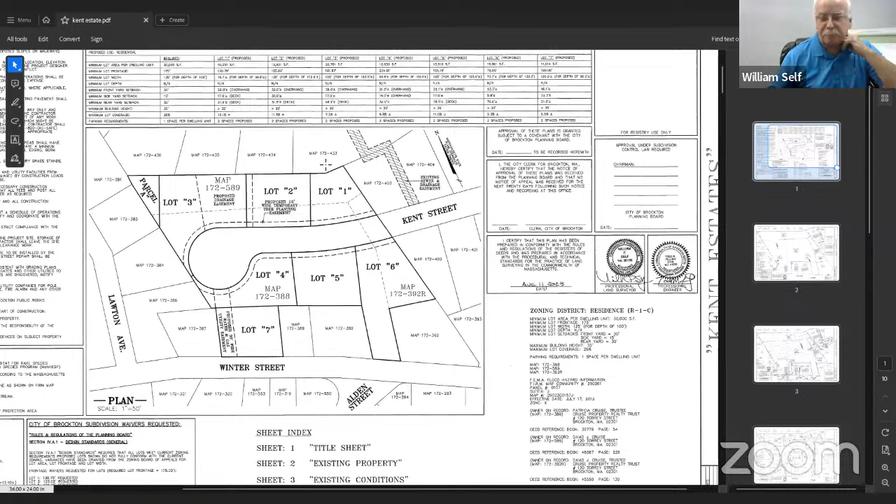Okay Bill, you're ready? Yeah, good evening. If Sean, if you could call up the plans, if you could have the screen, Rob. There we go, can everybody see that? Yes, sir. Yeah, we were here in front a few months ago with the preliminary plan. From then, after approval, we went to the Board of Appeals and got approval on the lots that were deficient in area, frontage, and lot width and depth. As you see, I'll explain exactly where we are. This is up off of 262 Winter Street, being shown where lot 7 is. And then access for the subdivision will be off the end of a dead end, existing now, Kent Street. And at the end of Kent Street is lot 6, which is number 34. Both number 34 Kent and 262 Winter Street are owned by Dave Cruz Properties.

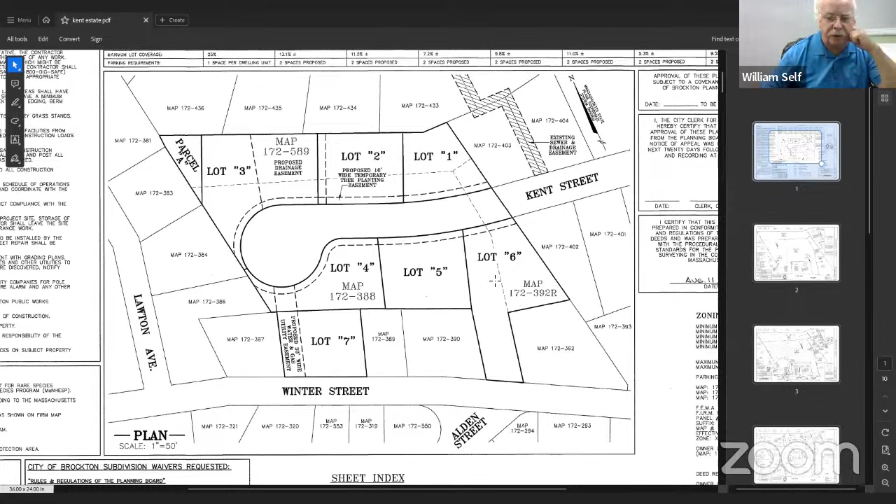If we could go to sheet number 2, Sean, and if you could reduce that a little bit. Sheet 2 - I just wanted to show the board, remind the board, what the configuration was. You had 3 separate lots. You had the 262, which is comprised about 2 acres. You had the lot to the back, about 28,000 square feet, over half an acre, that was owned by the city of Brockton, bought by auction by Dave Cruz Properties. And you also had number 34 Kent Street. If you look at number 34 Kent Street, it was a very, very odd configuration when the lot was first created. What we needed to do was redivide everything, both those houses, both those lots, and create the roadway. By the results of that, we improved the condition, certainly of number 34.

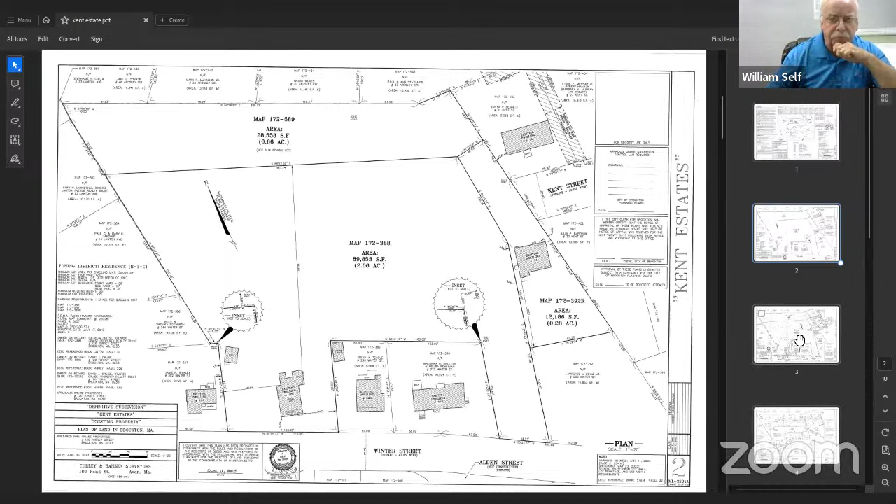If we could go to sheet number 3, I think, Sean - sheet number 4. As you can see, if you can just see where the original lot lines were dashed in, you can see the reconfiguration starting with number 34. You can see that it certainly made it a much better lot.

With the reconfiguration, that was the lot with the least frontage of all, which we ended up asking for relief on, for 75 feet on that. The way we looked at it, it had great improvement to where the house was. Now you can actually have a driveway, and a more usable lot out of that.

The rest of the lots that you can see are all being proposed as raised ranches, consistent with the other housing in the neighborhood, except number 262, which is an older colonial style home fronting on Winter Street.

They'll construct a cul-de-sac at the end. We asked for a waiver on the total length of Kent Street to be able to develop this particular configuration.

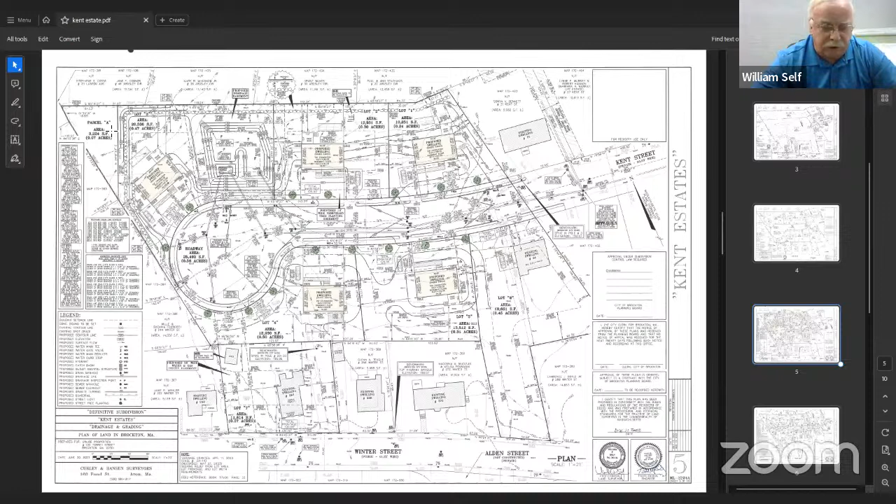Yeah, Mr. Sweeney, the only waivers we're asking for as far as utilities, under the recommendation of Chiki, we had moved some basins down, and because of that we needed a slight waiver on cover, a 4-foot minimum, but he was fine with that. We went over everything with them and showed them what we're doing, so that's listed on page 1, all the waivers that we're asking for.

It's all inclusive. There are three waivers, correct? Frontage waiver for lots 1, 2, 5, 6, and 7. And then for the dead end street, correct, and then the typical residential cross section.

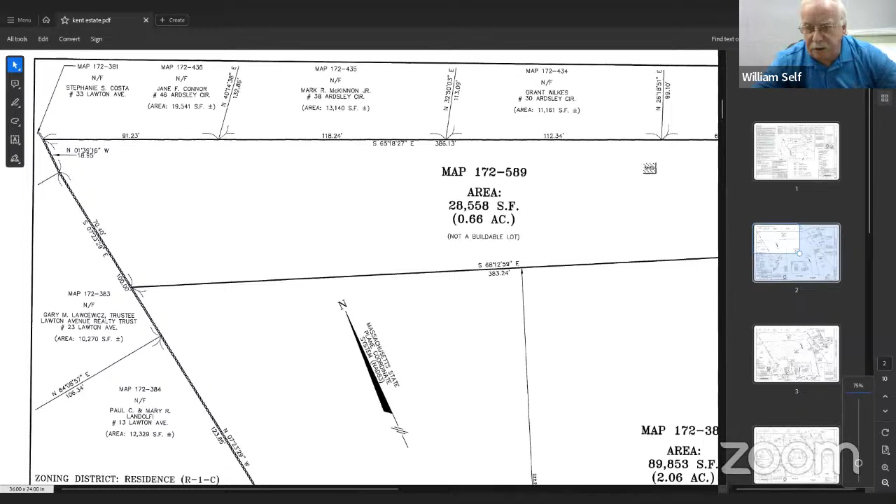If you go back to sheet 1, Sean, you'll see the waivers we're asking for the design standards, exactly lot 1, 2, 5, 6, and 7 were the waivers for the frontage. For the dead end street, we're asking for the waiver of your 700 feet to 810.8 plus or minus feet, which is an extension of about 394 feet of roadway that we're adding. And then the other waiver we asked for was the cover over the pipes on the drain pipes that are listed on sheet 1.

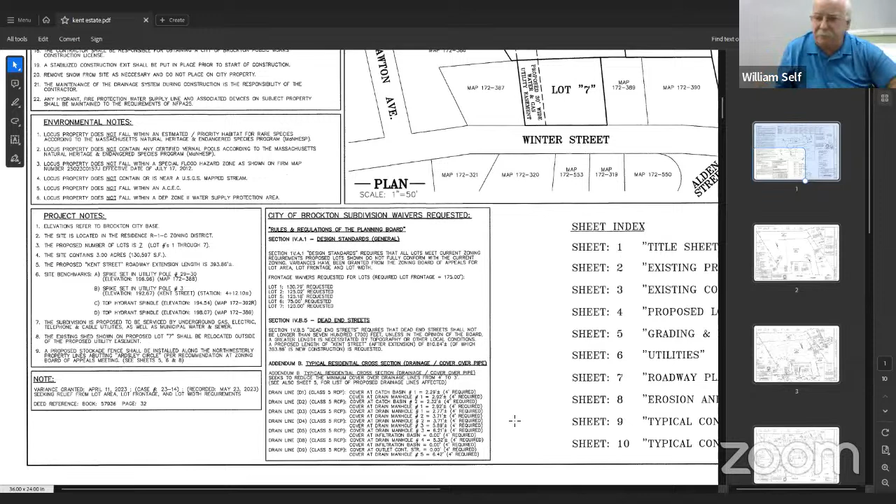Okay, so if this plan is passed, then these waivers would be voted on individually at the end. Okay. Madam Chair, if I could ask a question? Sure. Mr. Self, how do you do? I was not on the planning board when you first came, so I just have one quick question. I understand that the neighbors were talked to, all the abutters around this development.

Yes, we had at least two on-site meetings during the design stages. We had one when we first initially came up with it, and we also had a secondary one getting closer to the final. We had those with the city council, and we settled up with them, so it worked out very well. The abutters came in.

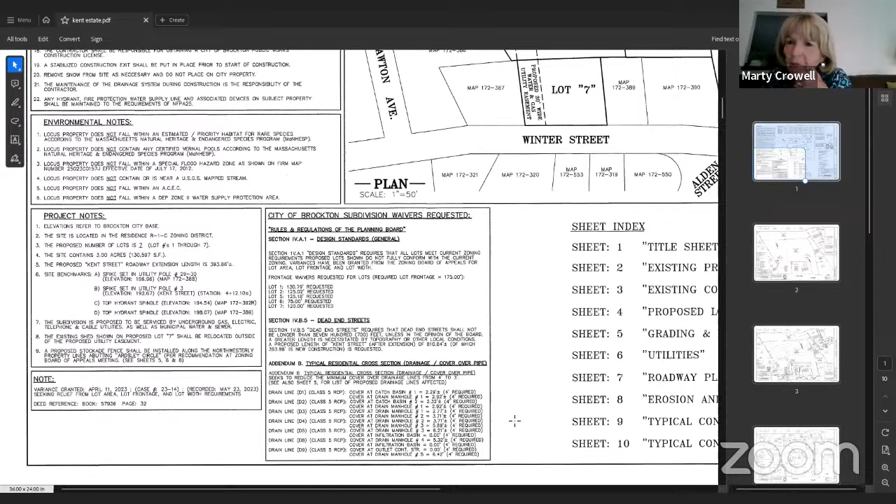Again, the concerns that were brought to us are always water drainage, surface water, things like that. And the other thing is they all want privacy, and the new lots will want privacy as well. So that was brought up and agreed with the homeowner, so we thought we were working with the neighbors as well. The development is going to add to their property values as well. I certainly hope so. Yeah, it'll be nice, new, and there's been improvements down in that area already, roadway improvements. So it'll be a great asset to the neighborhood, we feel.

Okay, again, thank you, they were very helpful. Thank you very much. Thank you, and welcome to the board. It's nice to see you. Nice to meet you, thank you.

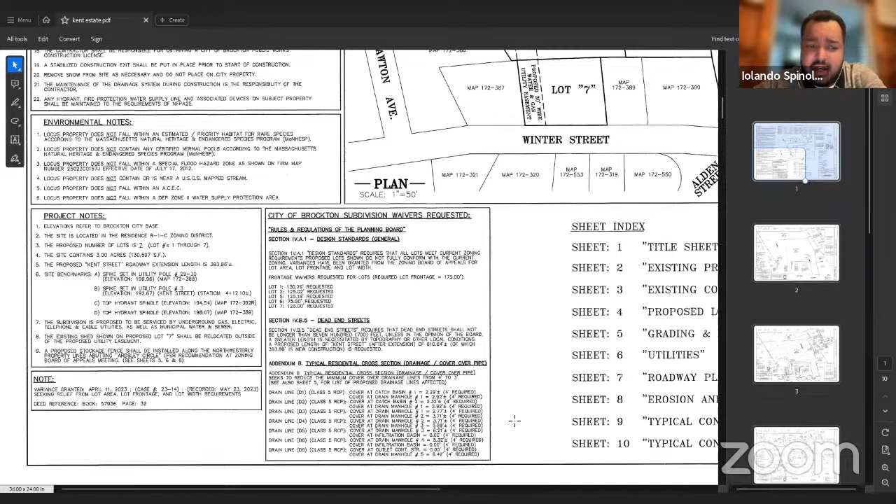Okay, other questions from the board? Yes, Madam Chair, I'm just wondering if he can speak on amenities like streetlights or sidewalks. Are those not included?

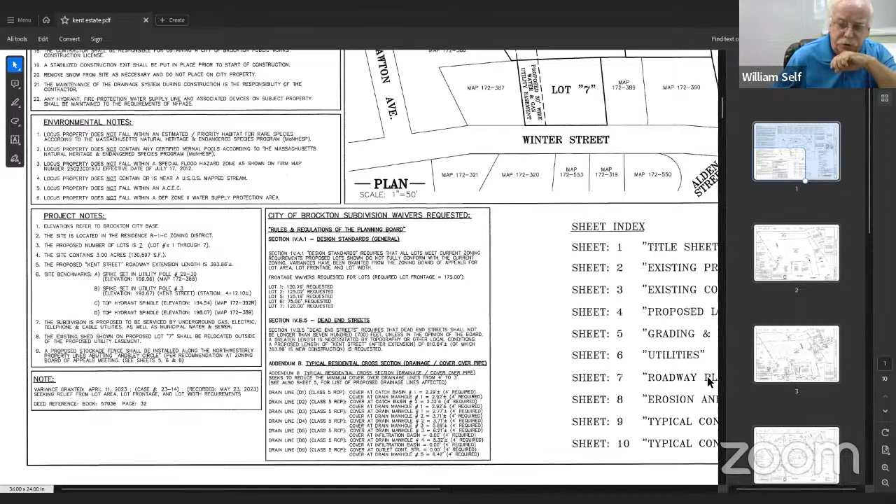Yeah, Sean, if we could go to sheet 5, actually let's go to sheet 6 if you would. Sheet 5 is good, well, sheet 6. Yeah, that's good, sheet 6. What you'll see here is what we've done. We haven't asked for any of your roadway construction waivers. It's sidewalks on both sides, granite curbing all around. These lots are being accessed and built on for both sides, so it's not like it's just a one-sided street where there's a different case for use of sidewalks and things.

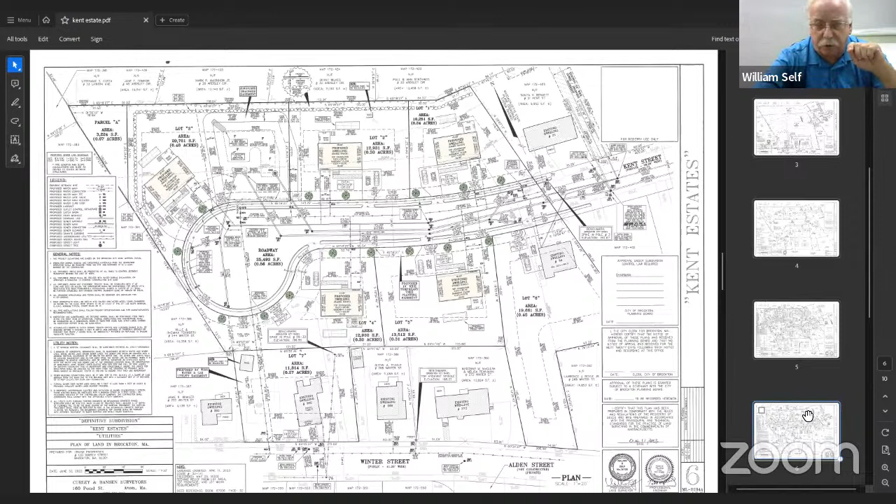So those waivers, we have not asked for any waivers on sidewalks, curbing, or street width. We feel Kent Street has good width to it. It has no sidewalks or curbing on it, but in the future, should the city do an improvement on that, it would certainly add to a nice street.

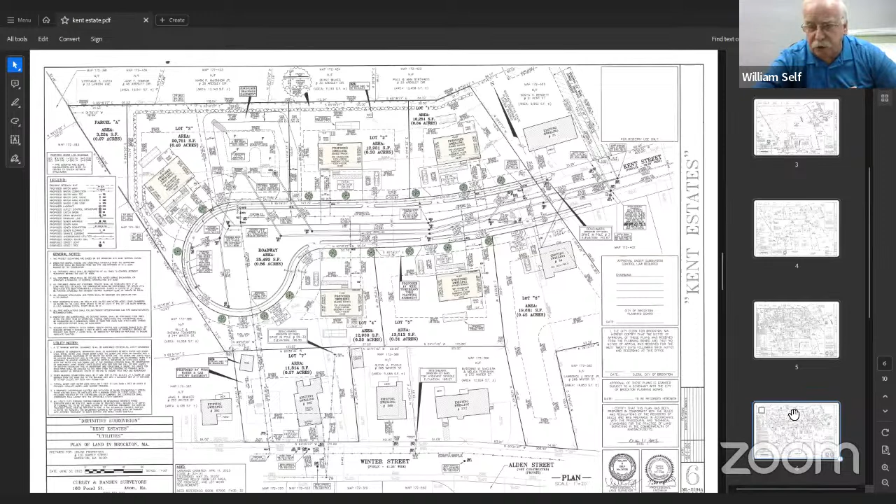The other thing we try to do in our subdivisions is create a 10-foot planting easement all the way around the street on the back of the lots. That's where we put our trees. The green circles here show where the plantings will go. We try to get 2 or 3 on each lot.

The reason we do that is to keep them back so that in the future they're not lifting up the sidewalks. Over years those trees grow, and next thing you know everyone's tripping on the sidewalks because it heaves the concrete or cracks it. So that seems to work out well. That's the amenities we put in to dress it up as best we can.

Thank you, I appreciate that. Seems like it's well designed. Yep, thank you.

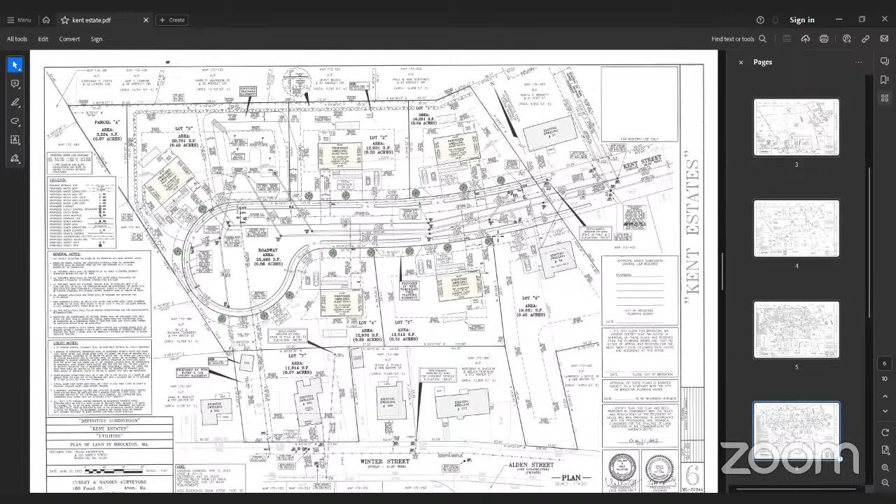I just mean keeping what we have, but also some kind of restoration. The people are worried about making eye contact out of their back window with someone else. That's half the fun of being neighbors.

And, Madam Chairperson, if I could just jump in quickly. I think what the contractor realizes too is that it works both ways, privacy for the existing residents and privacy for the new lots as well. We feel that with the raised wall down and back, and that little plateau plus that open area, we're going to try to save as much as possible, as everyone has seen, once trees are cut down in what's not really a dense forest, the trees look a lot different once you take all the brush and everything else away.

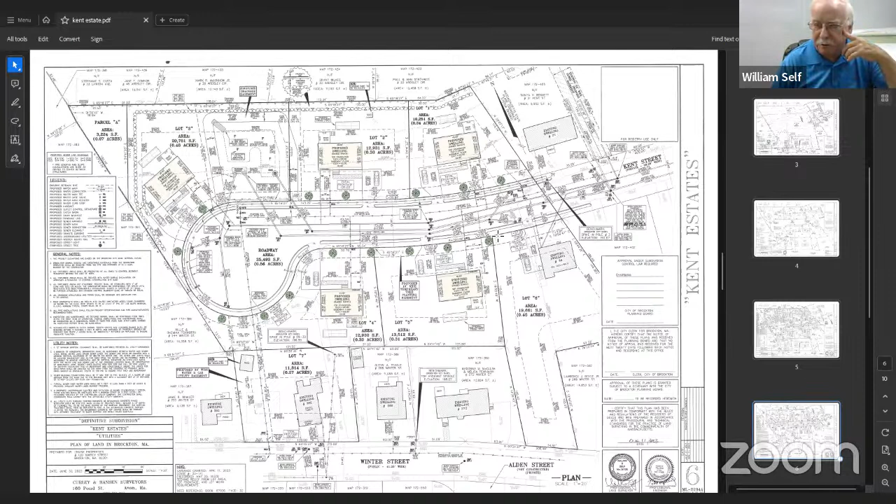But I do think there'll be additional planting from the new homes. They'll want to plant along that wall, and that'll be for additional privacy in the future. That's what we're hoping and encouraging. Thank you, all right, thank you.

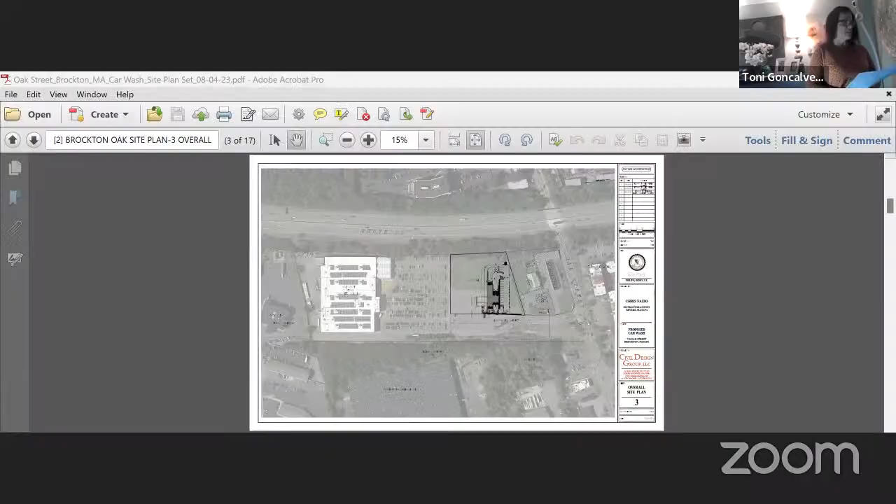And while you're doing your presentation, can you also speak to the approval needed from conservation? I guess there's an outstanding issue or meeting with them, if you could clarify that for us. Sure, for the record, my name is Phil Henry with Civil Design Group.

We are the civil engineers on this project. Can everybody see the screen? Could you make it a little bit larger, Phil? Let me see if I could zoom in.

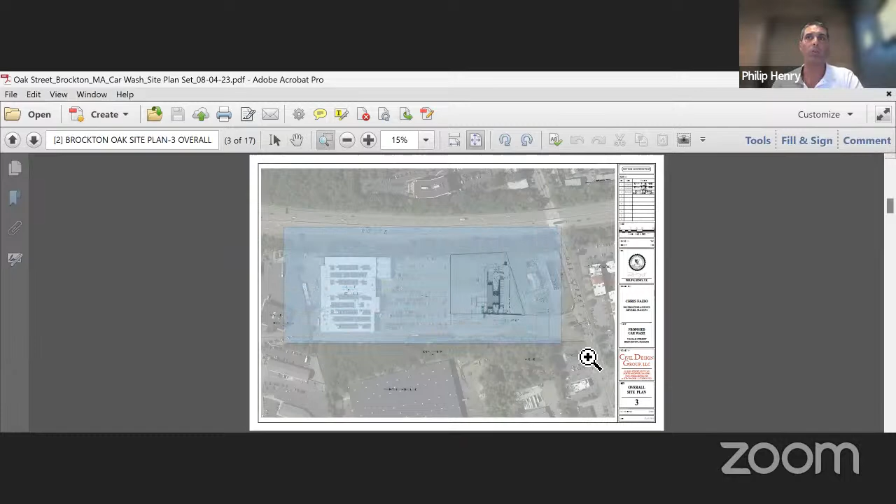I'm going to start with this locus plan to orient everyone, although I'm assuming everyone knows where and what we're talking about. Is this better, Rob? Okay, so just to situate everyone, Route 24 is running along the top of the page.

Oak Street is running along the right side of the page, up and down. This is the Walmart here, and this is the Walmart entrance. The subject property before you tonight is this trapezoidal lot area, about 2.5 acres in size. As you can see from the aerial underlay, it's largely comprised of open lawn area and a section of the Walmart parking lot. What you see on top of the aerial is the facility that we're before you tonight.

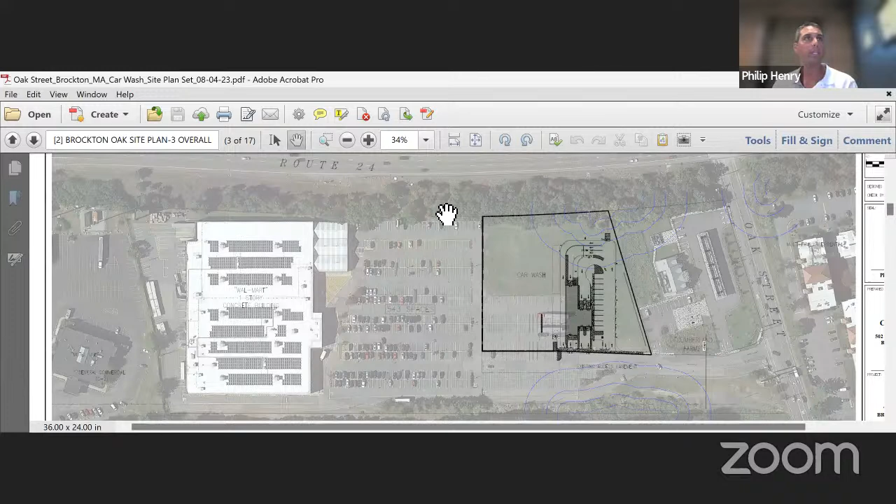So with that being said, I'm going to pan down. Okay, so now I've zoomed in and rotated the property such that Oak Street is off the page here. The convenience store and the gas station is just off locus in the front here. This is the Walmart parking lot, or drive aisle excuse me. And then the Walmart is off to the rear, off locus in the southerly direction.

So what we're proposing is about a 4,500 square foot vehicle washing facility that you can access via one main access drive off of the Walmart drive located here. As you enter, you have the option to use one of the 12 vacuum spaces, one of which is ADA compliant. Once you're done vacuuming your car, you can then enter one of 3 ways into the facility - there are 2 entrances here, and then there's also 1 entrance here as well.

There is also, should you just want to vacuum or decide you needed to leave the facility, this outermost lane which provides an overflow queue lane, just to exit and not be stuck in the queue itself. In terms of exiting the property, all access drives exit back onto the Walmart driveway. Then you could choose to either go back to your vehicle after the car wash, or exit via the signalized intersection on Oak Street.

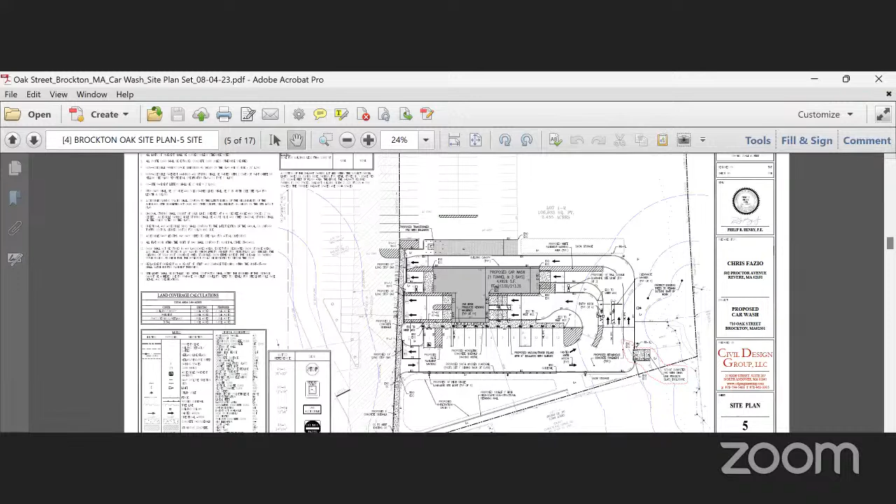So Mr. Henry agreed to that, caution signs, cars exiting, and so that can be, if this is passed, it can be a condition. In the way of speed bumps, what were you thinking, or what was the zoning board thinking?

Well, we didn't get to that point. We did know that they have to stop here before. We just made it so we can kind of see it before it happens, kind of thing. And if it does happen, I'm hoping they would take the proper precautions to keep people from frequenting a massive store like that. So I just don't know how the board feels about anything else of that nature, but I just kind of wanted to get it out there.

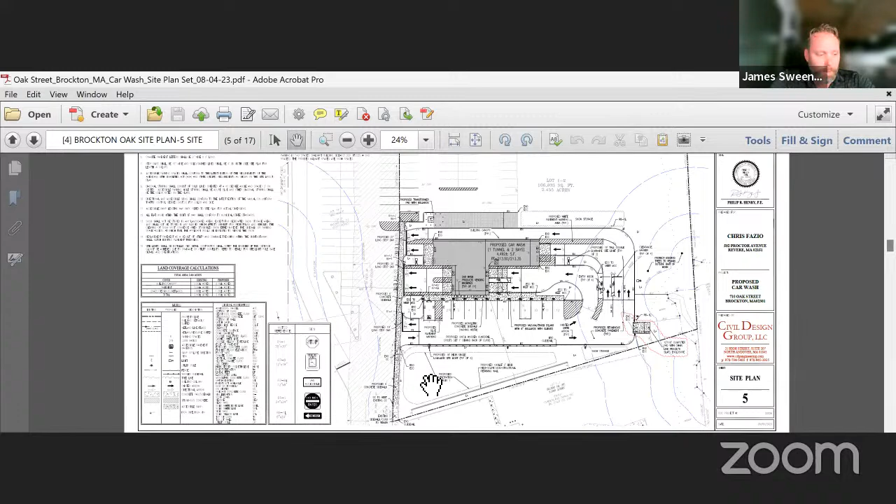Yeah, it's kind of hard to tell what's going to happen. In one sense, I think it might slow down people coming out of Walmart, and then if the sign Mr. Henry agreed to, and if there are further issues, hopefully you'll work together.

Who's the property owner? Is that? I am Chris Fazio. But the whole lot, the Walmart, is the whole Walmart larger area, the whole property.

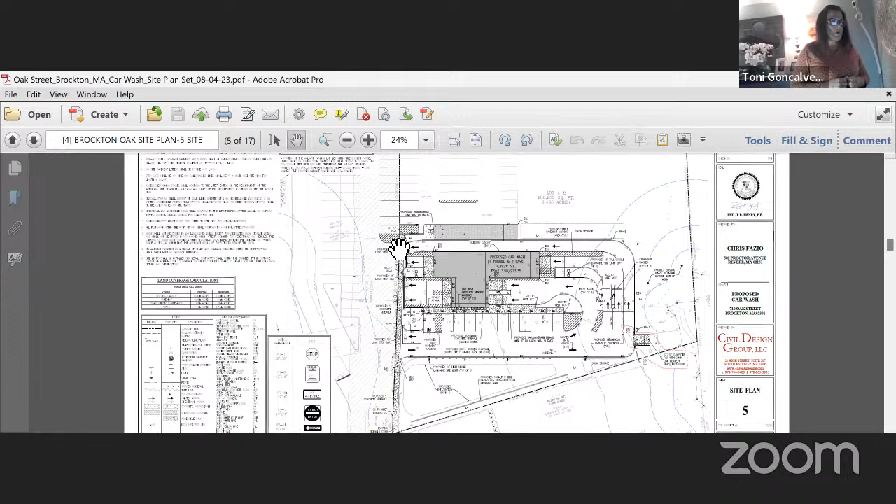Just to clarify, the 2.5 acre property where this facility sits was subdivided out. So it was once all Walmart's property, but this is its own property, as is the convenience store and gas station up front, its own property. So technically, there are 3 properties here, if you will: the Cumberland Farms that faces Oak Street, and then this property before you tonight, which accesses its property through the Walmart easement.

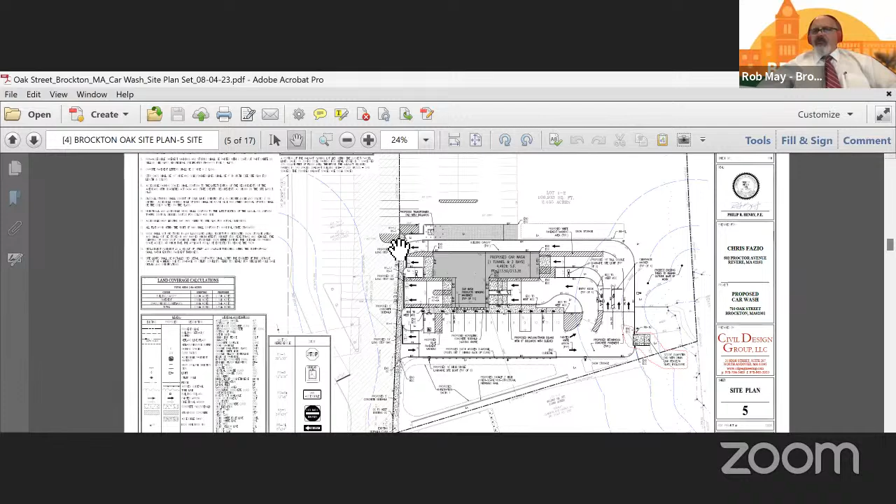Mr. Henry, could you go back to the locus map that had the ortho behind it? It was easier to see where vehicles were coming and going.

Yeah, I mean, just based on anecdotal experience, because we did the Cumberland Farms as well, a good majority of the folks also use this outside lane. Although I agree with you that incoming traffic uses this inside lane, if you will. But, you know, we would tend to agree that with the structure here, I think folks will naturally slow down.

We're also willing to add any signage that the board may feel necessary on our property, and we'll be committed to working with Walmart to the extent that we can on adding any signage on their property.

If I could just add, I mean, I can foresee this. If someone's coming from right where 24 is in the top part of the parking lot from Walmart, you know, I could see him coming right to a point where your exit is, coming through there, and you've got, you know, a corner right there. That's not, you're not going to change any of that parking lot within your property, right?

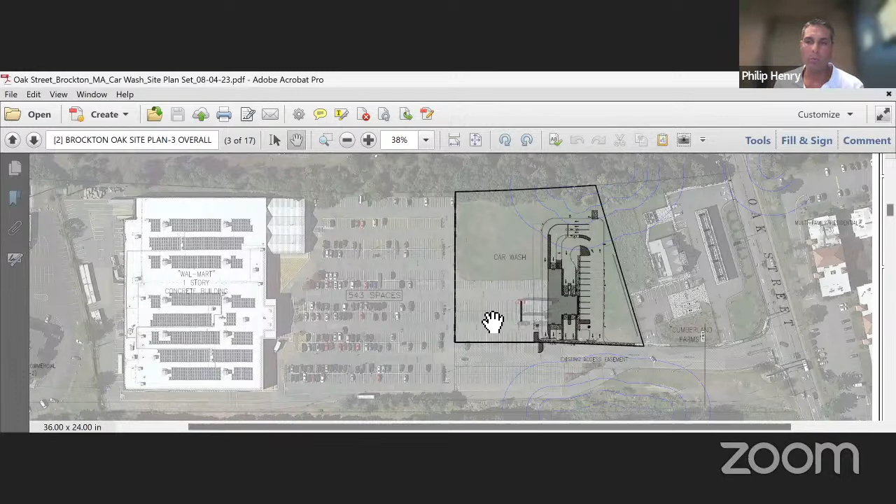No, we're not proposing to change that. I can see, assuming another car is coming from the opposite side, you triangulate on the exit of your car wash.

Do you see what I'm saying? Are you saying people are going to cut through here? Potentially. You might want to consider boxing off your property. That way you keep a straight line, and that would avoid such a wide angle of cars meeting at the same point. Do you know what I mean?

Yeah, I know exactly what you mean, and I appreciate the comment. I believe, and I'm not the transactional attorney on behalf of Chris, but I believe there is language that requires the parking spaces on Chris's property for Walmart to be unimpeded. So I don't know if we can do any physical hindrance here.

But could you cap the ends of those rows with some sort of curbing? Right where your cursor is, at the end of that row and up the end of that row, that would eliminate a lot of cutting through and maybe draw the traffic down, just to get it straight, a beeline.

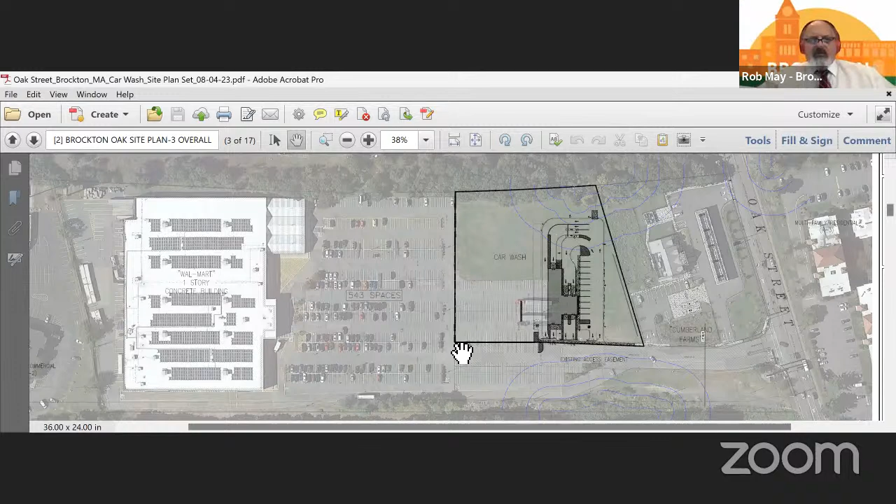Mr. Henry, could you zoom in a little bit more so we can see where that is? Because it looks like the property line is at the back or in the middle of a parking stall. Yeah, it's along the spine of the striping.

Madam Chair, I was wondering if they can clarify, you can't restripe any of those parking spots? Or you can't do any restriping on your property?

I believe there is language in the agreement when Walmart sold this property to the seller that a certain number of spaces needed to be maintained. And I could tell you that the number of spaces proposed to remain meets the zoning, which is 543 spaces based on the current zoning parking requirement per the Walmart gross square footage.

So, in full transparency, I think carving out some end caps with landscaping, although that's a very good idea, I just don't want to put the Walmart in non-compliance. Which is why... go ahead.

Quick question. Right where the cursor is, just below the property line, there's a little appendix that seems to stick out, shaded as if it were a landscaped area. Is that true, a landscape buffer? Here, because that's where the lane changes. That's right. Yeah, so this is proposed to be striping.

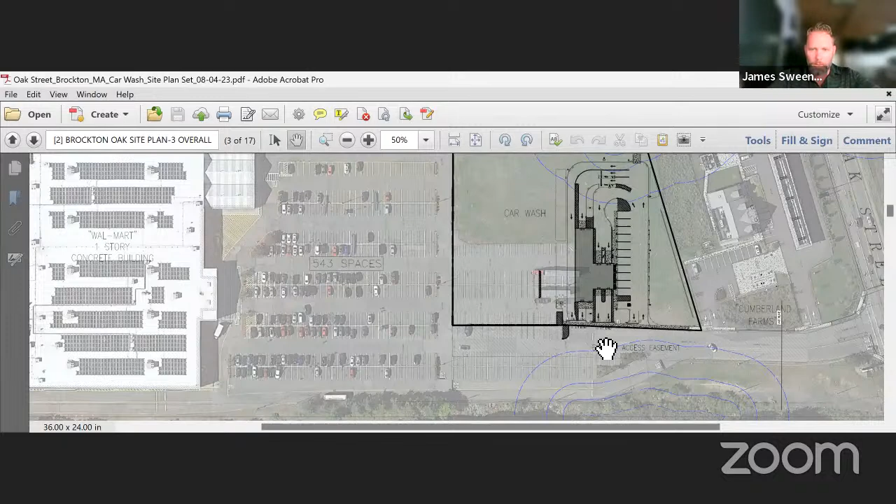So if you're coming out of the Walmart and looking at your property from that side, where the rows are, could there be signs with directionals to focus the traffic going down where we want them to go? That shouldn't be a problem. Maybe two signs on each of the rows there, so at least we're telling them where to go.

And if you could work it out with Walmart, that end cap where you have your little appendix hanging down outside of there, if that were a raised planted bed, that would be a lot more conducive to slowing traffic than just the safety tape. But that's something that's not on your property, so I understand you'll have to negotiate that with Walmart.

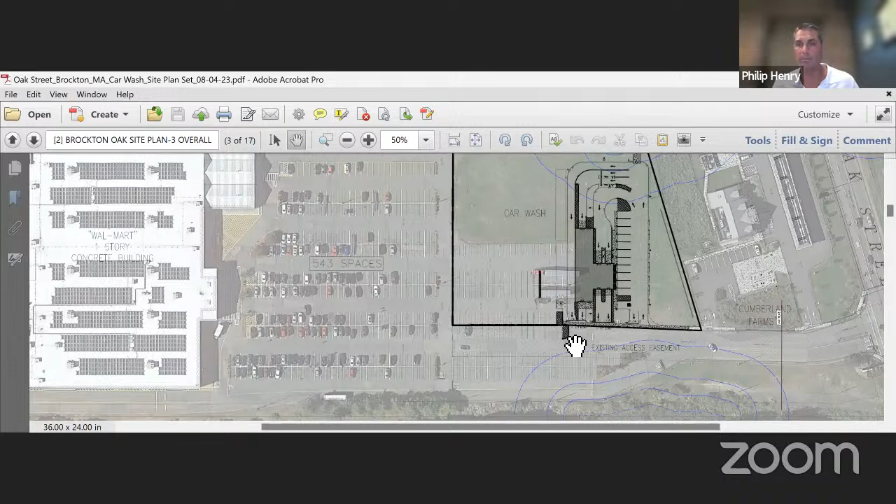Exactly, yeah. We can work in good faith with Walmart and propose that, because as part of this deal I think Walmart has to approve the layout as well, so we can show that to them and they could opine on that. I think one of your strengths here is this traffic is also their issue too, so working this through behooves them as well.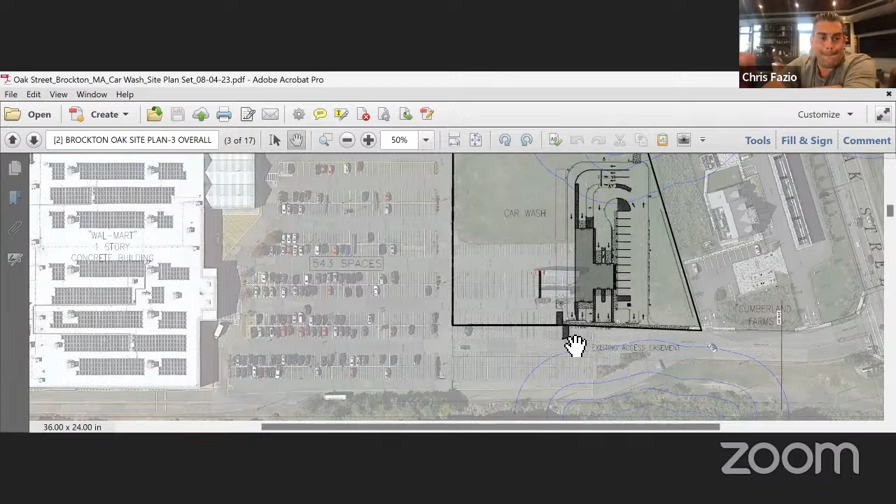Madam Chair, if I could — this parcel of land was originally intended to have many stores on it, and it sat for a lot of years with just Walmart there. So I welcome this car wash.

I live on Oak Street and I frequent Walmart. When you turn in from coming down Oak Street to take a left, there's an arrow for people to come in and arrows for people to come out. The light is excellent, and since Cumberland Farms has been built, I don't know of any problems. People can clearly see there's a gas station there, and people are exiting and entering the gas station right from that Walmart road. So I don't think it will be a problem to add a car wash. I really don't see it to be a problem.

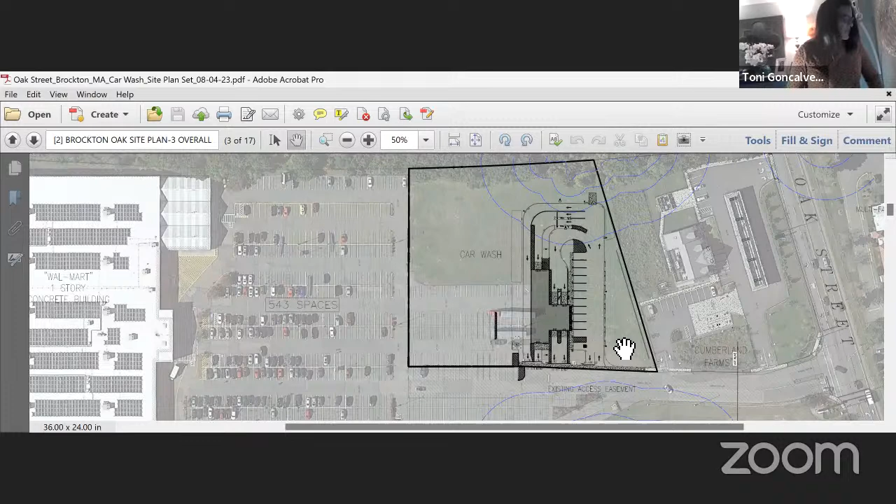No, it's designed nicely, but I do think we need to take caution with the cars exiting. We were very cautious when we approved Cumberland Farms with the way cars entered and exited to make sure there weren't any issues. We just want to do the same with this very nicely designed car wash. I also welcome it.

Madam Chair, I just have one question. I noticed that Cumberland Farms has a sidewalk approaching the Walmart. I know this is a car wash and you're not going to have people walking up to it, but there might be people passing by the car wash to get to Walmart. So I was wondering, is that little shaded area an extension of the sidewalk? Yes, when we met with Rob May in his office, probably over a year ago, that was his first comment.

So there's the sidewalk. Great. I appreciate you all — it seems like you're trying to be good stewards. I appreciate that.

All right, any other questions before we open up? Yes, Larry. I have a question — not so much about the plan, but the operation: what are the hours, and is this an automatic car wash, or a manned car wash, or a little bit of both? This is fully manned, minimum of 2 employees at all times.

There are 2 in-bay automatics, and there is 1 tunnel that is fully automatic. So there are no self-serve bays where the public can come in and wash their own vehicles. They're in the vehicle the whole time; they do not exit their vehicles. There's no walking around — the only time they would be walking around is just vacuuming their vehicles. So again, it's fully automated and it is fully manned.

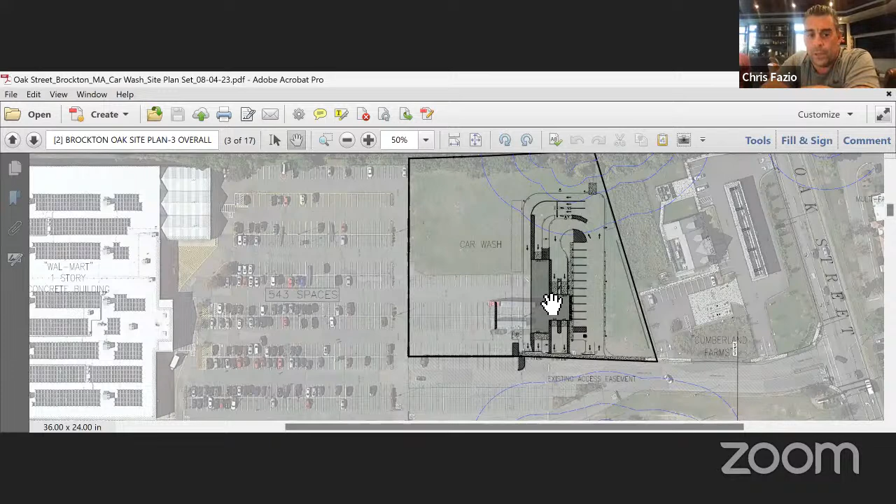And the hours of operation, Chris? 7 a.m. to 7 p.m. Okay, 7 days a week? Yes, 7 days a week. Thank you. You're welcome. Thank you for the questions, planning board members.

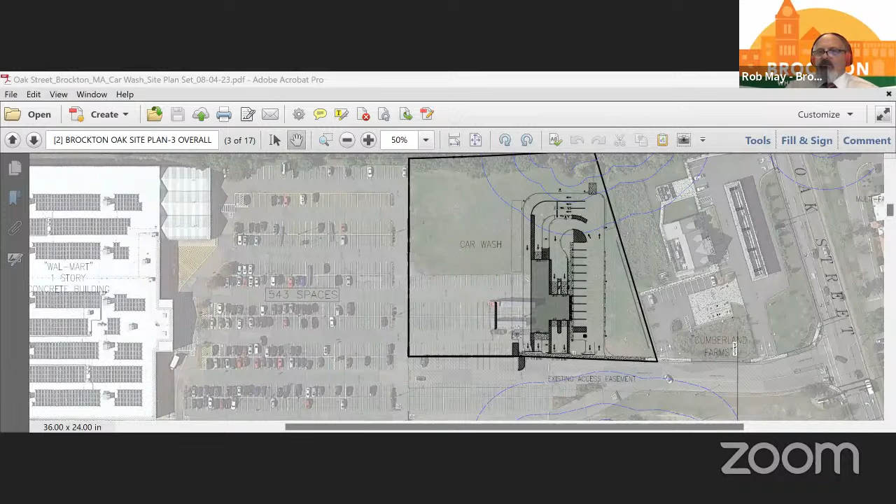Okay, so before we're ready to make a motion, if this plan does pass, there is one condition: flashing caution signs on the front side of the building and the back side facing Walmart.

Is there a motion? Motion to approve with standard conditions and also final approval being contingent upon the Conservation Commission approval, and we need to add the condition for the flashing caution signs. I thought you were prefacing that, and also the conditions stated by the chair. Okay, thank you. Second, Marty, did I hear Marty make a second? Yes, second. All right, perfect.

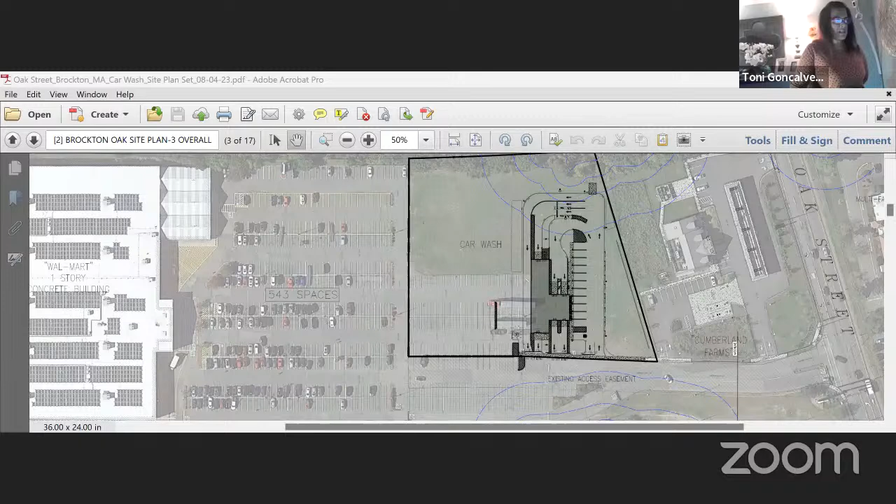Roll call. James Sweeney, yes. Marty Crowell, yes. Larry Hassan, yes. Yolanda Spinola, yes. Toni Goncalves, yes. Congratulations, Mr. Fazio. Thank you, Mr. Henry. Thank you. Good luck.

All right, next up, we have a site plan review, 26 School Street. This is a 40R, and the representative is Scott Rubin, Esquire.

Scott, we've brought Carlos forward, but is there anybody else on your team that should be here? Yes, we have Coleman Barnes. There's Coleman, yes, most importantly. He should be joining now.

Hello, everybody. Looks like my camera's having some issues. Give me one second. As long as you can share your screen, that work? Who's having issues? Coleman Barnes, it's just my camera. We can continue if that's fine. Okay, yep, sure, we can hear you.

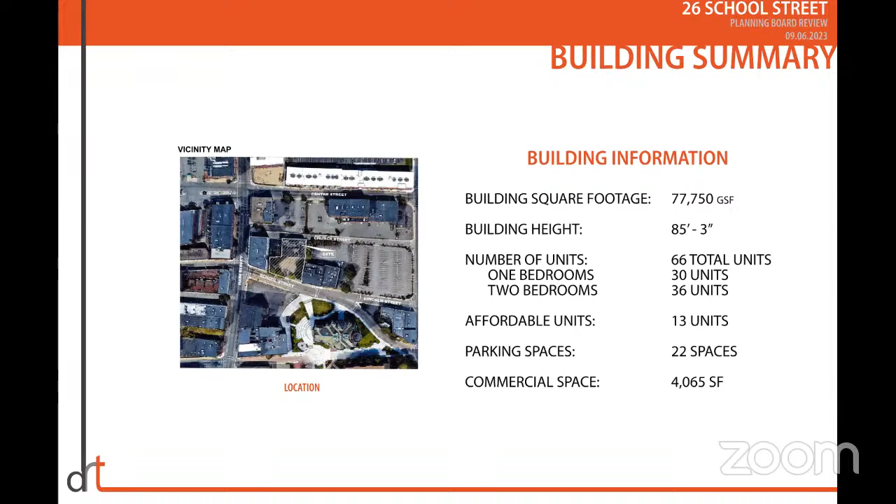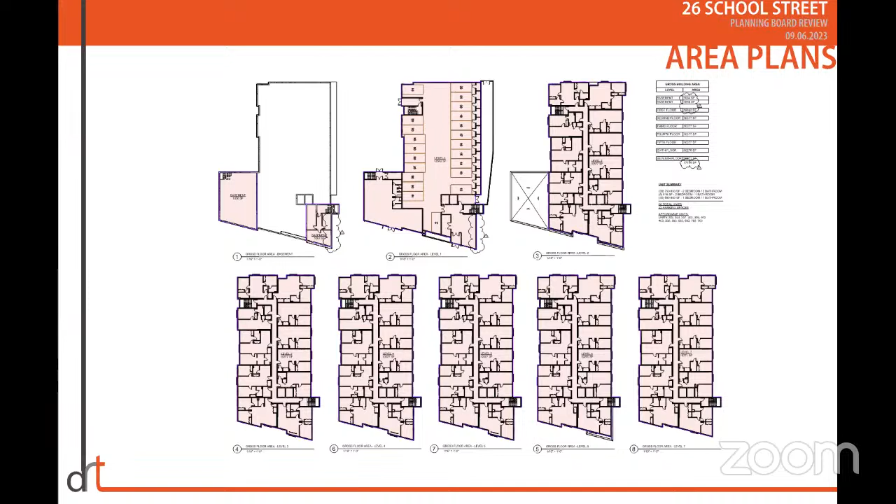I have a couple of large plans that you'll be able to see a little bit better. Just another quick shout out to the unit layouts - you start to see how we're laying out the 1 and 2 beds, and how some units specifically will have 2 bedrooms 2 bathrooms, some 2 bedrooms 1 bathroom. Again, just a quick noticeable layout of how we're laying this out floor to floor to floor.

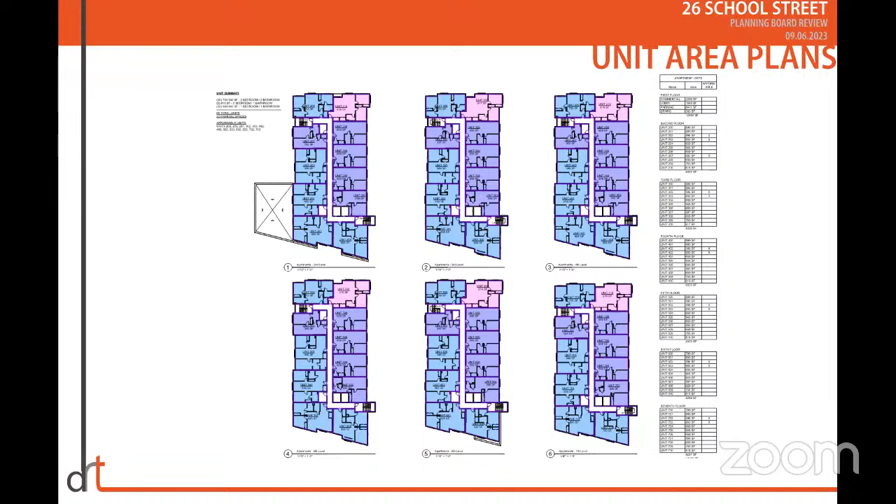One, enhancing that space, putting a better street appeal for it, as well as a reception seating area, really utilizing some mailroom portions, kind of dressing up that portion to really make it a focus for the residential. And then we also dressed up the retail side of it too, to match that and make that street level really appealing to anybody passing by.

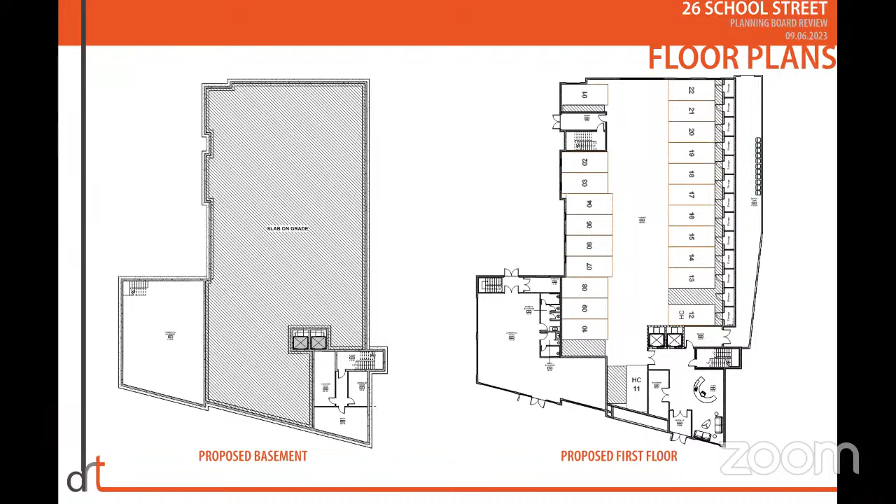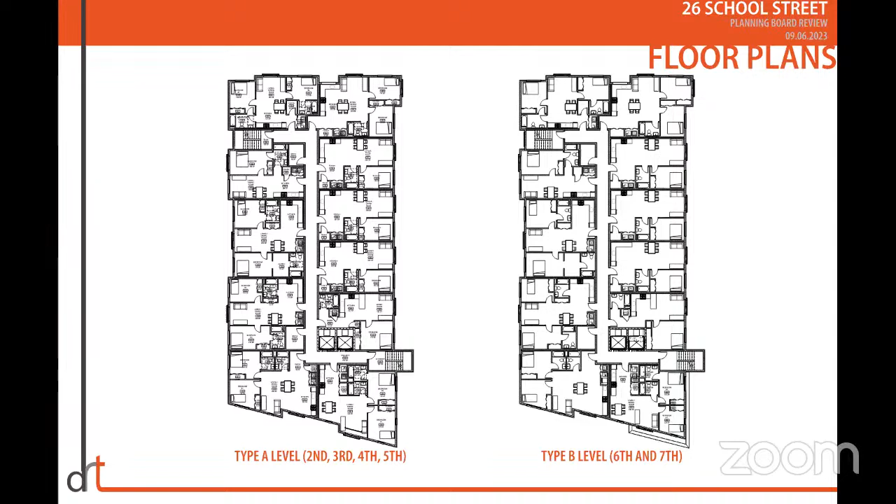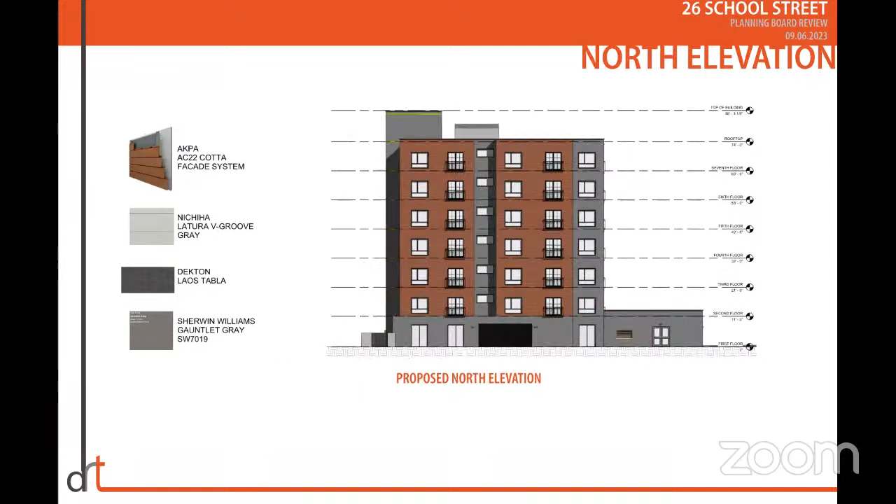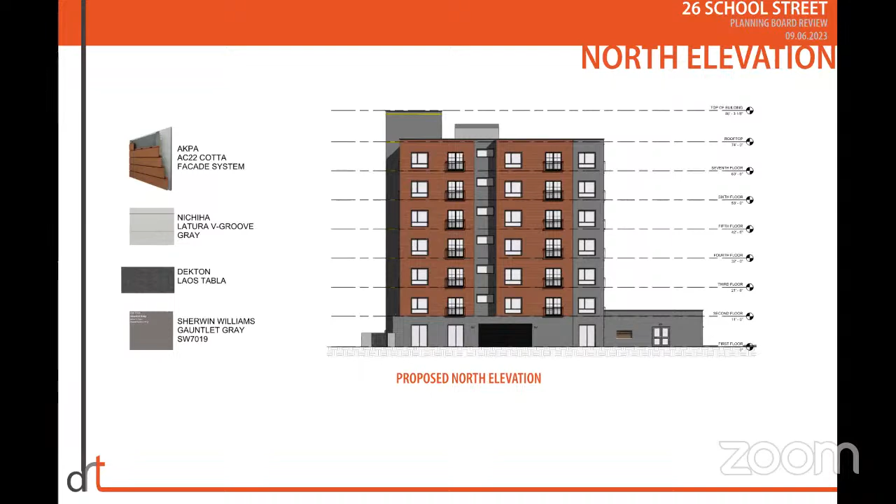Again, on the west elevation here, adding some Juliet balconies to really dress that up so it's not just a flat facade - another conversation we've had. The north elevation on Church Street, where we'll have our garage opening entrance, as well as the rear of the retail spaces and access for them to drop off goods and whatnot.

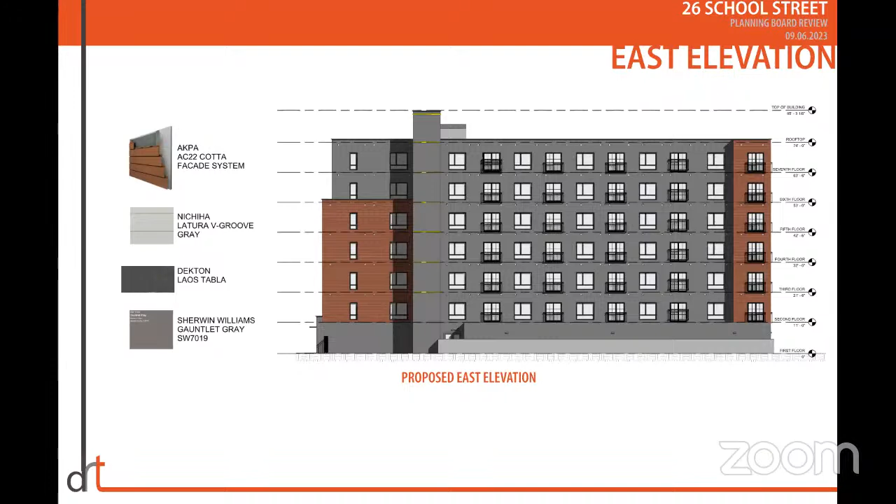And the east side, again emphasizing those Juliet balconies. We're also dressing up our stair shafts so we don't necessarily just have one box standing out from the building. We have another image I'll show you that kind of stands out - here's just a little before and after for you to see how that's changing the scenery and how it blends in.

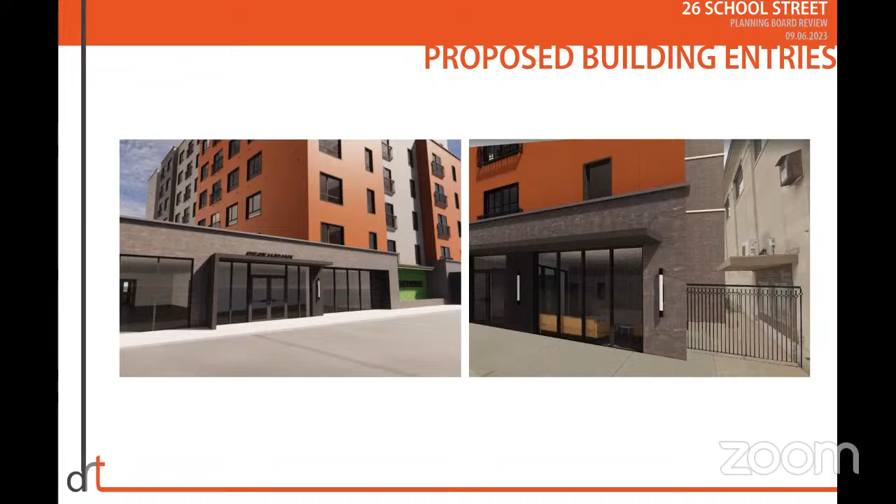Quick shots of the upfront entryways - we dress these up with some eyebrows and a lot of lighting to draw people in. And then here's just a shot of some nighttime views, again using lighting to make the building pop, as well as make those entryways pop to help direct people on the pathways walking by.

And I'll pass it over to Scott to elaborate on some of our waivers.

Thank you, Coleman. One of the things we talked about at tech review, which Carlos Ferreira has been in touch with our neighbor to the right about, is to remove - if you can go back to that slide, Coleman. So this area was sensitive to the issues we can have downtown. Based on the shape of this lot, we really have this gap, and we needed to provide some room for our neighbor to access their building. We also asked them, and they agreed to remove that canopy, which is really over what used to be a walk-up banking window, from when this was a bank many years ago.

We're still in discussions with them. We're not exactly sure of the timing of that, but we also would like to prevent anybody with pedestrian traffic from sneaking up inside the building as well. So we're certainly sensitive to the issues that are downtown.

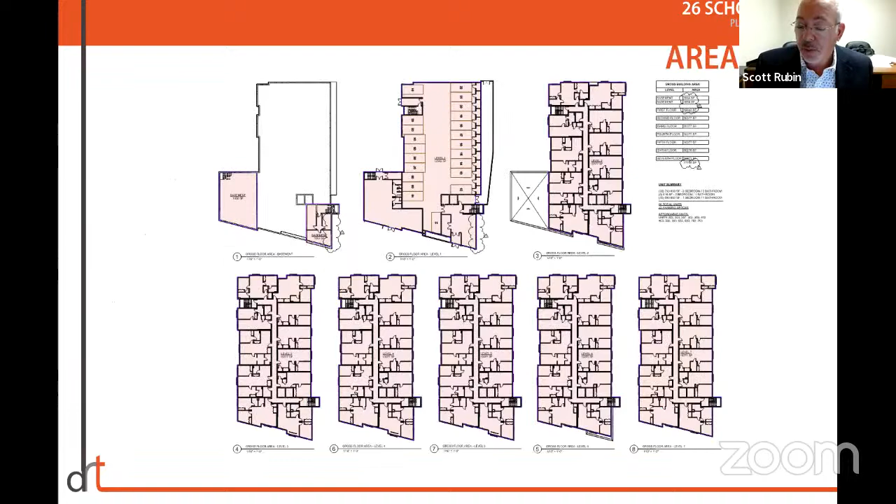Okay, thank you. You mentioned Lot B is going to give you access for a one-on-one parking ratio. Lot B across the street, is that it? I think that is adjacent to it. Lot B is on Lincoln, I believe. Yeah, Lincoln Street. And I believe our letter from the Parking Authority, let me take a look, they have provided us with 44 spaces. So that, in conjunction with the 22 that we have, would be 66. So I believe we're 1-to-1. I think the 40R requirement is 28 technically. So 44 and 22 on site matches at least 1-to-1 for the number of units that we have.

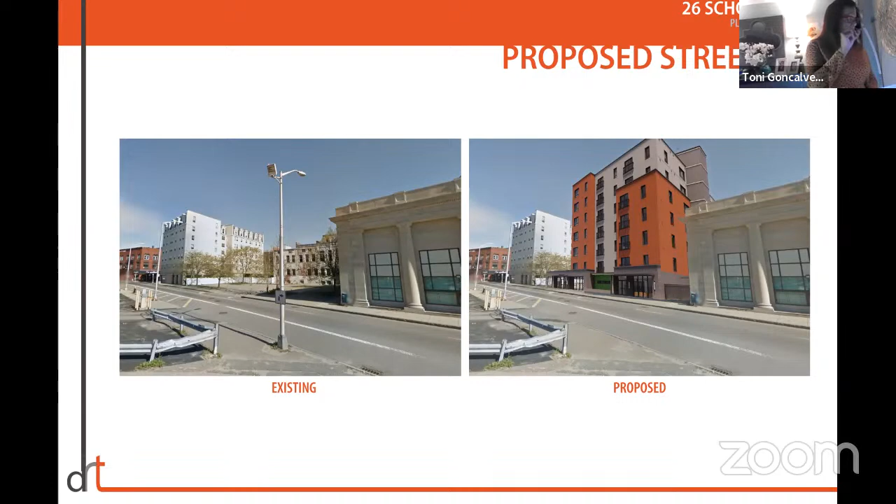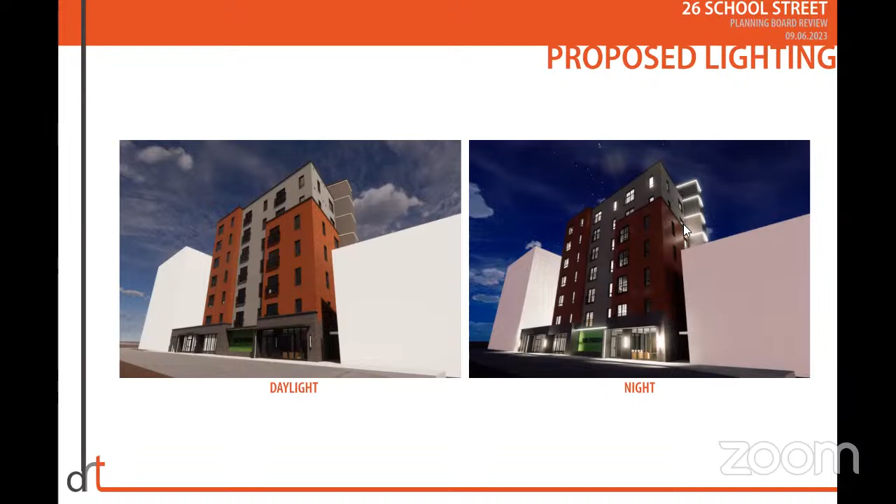And where are the lights on the building, like sconces for the side and front down to the sidewalk? I saw some next to the doors, but I don't think you addressed any along the top of the building or sides. Could you go to that night photo? So is the light just coming through the windows, or is there going to be actual light fixtures? So we have sconces along the street side, and then up the stair shaft here. Those would be illuminated at night. Oh wow, they go down on every floor level. I like that.

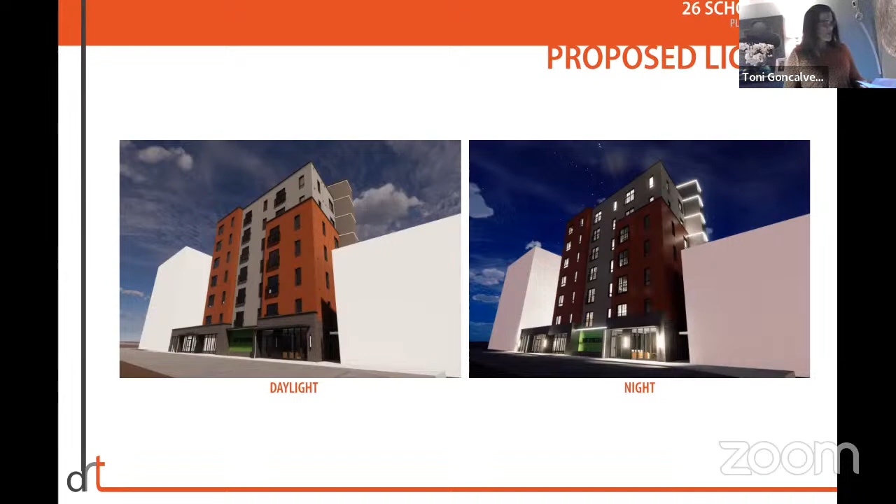Okay, and I might have missed this, but where's the trash can? How does the truck get the trash? It's on the side, on the right side of the building. We have trash here just behind the retail portion.

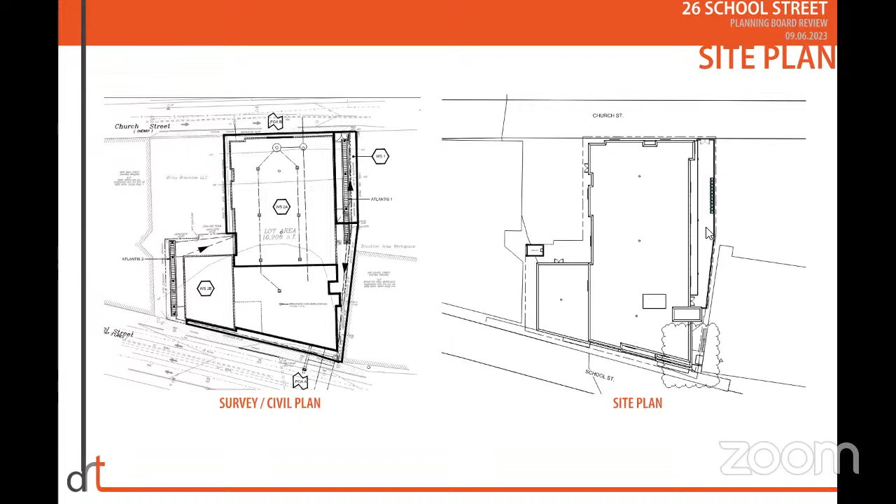The residential trash is also along this alleyway that is fenced in strictly for the building. So who picks that up? Well, we'd have to have commercial trash pick up that dumpster. And there's access for the truck to get to that trash can off of Church Street. Yeah, similar to how pretty much all the dumpsters are fenced in anyway, so they'd have to pull up and we'd have a rolling dumpster to aid that. Okay.

All right, thank you. Board members, questions?

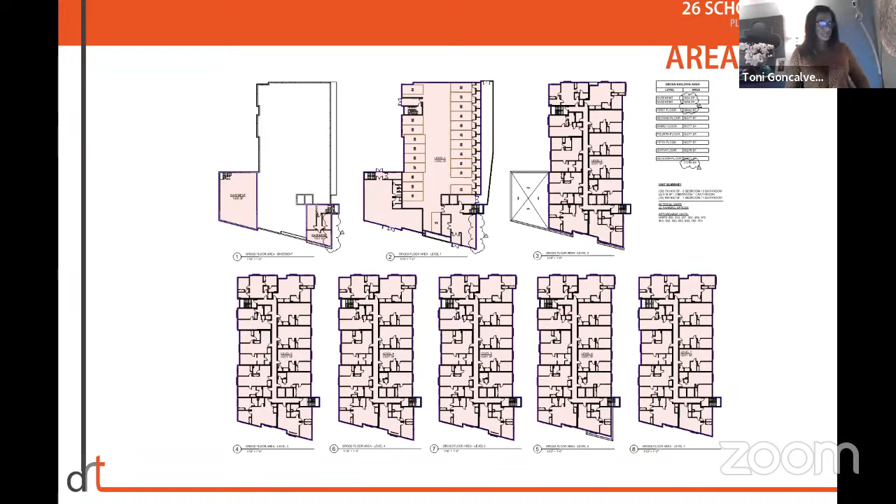Hypothetically, for the future, does the rooftop of this building support any rooftop activity? That's a conversation that could be had. We discussed the idea of a rooftop but didn't pursue it further, because the building is for rental use, and there's liability in maintaining and controlling the number of people who would go up there. We prefer not to give access to the homeowners.

The structure as it sits, is there open space on the roof potentially in the future? We could add to it, depending on future arrangement of condensers and whatnot. We also thought about having a decking area over the restaurant, but that would impact the apartments on that floor, so we decided not to do anything there either.

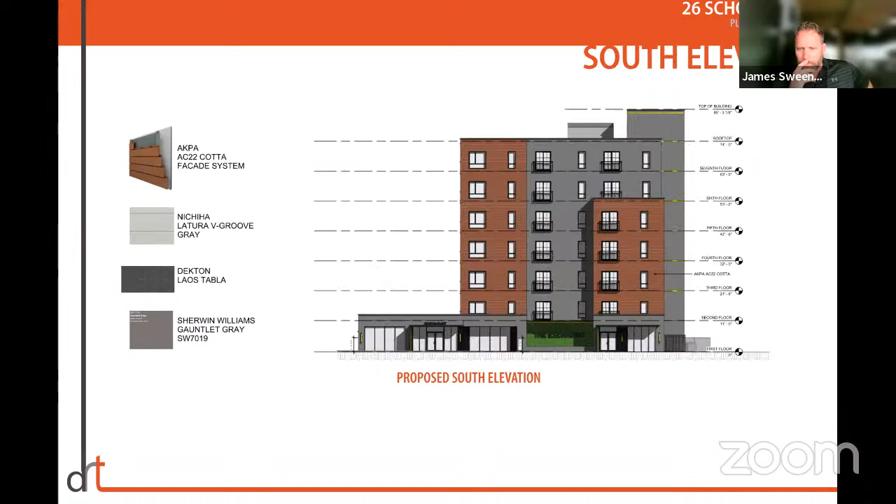My last question: could you pull up the space between the buildings again, where you have the trash? It seems like on the right side you really don't have much space. Where you have the trash, what is that dimension, what's the open space? Let me open the door. Off the top of my head, I want to say it's at least 10 feet.

Those doors are 6-foot doors, and the space is more than that. On the other side of the building, the left side where the restaurant is, the larger structure, is that all open from the wall there going towards Church Street? There's an easement there. So that access point would remain open. That's an easement that originally was for the building behind, which probably isn't needed anymore.

I'm thinking event space. Is that the type of space where you could host a small event? Where is our lot line? So I guess the question is, could the restaurant open up onto that corridor and have it with live plants, pots, live music, you name it? That easement is about 15 feet wide.

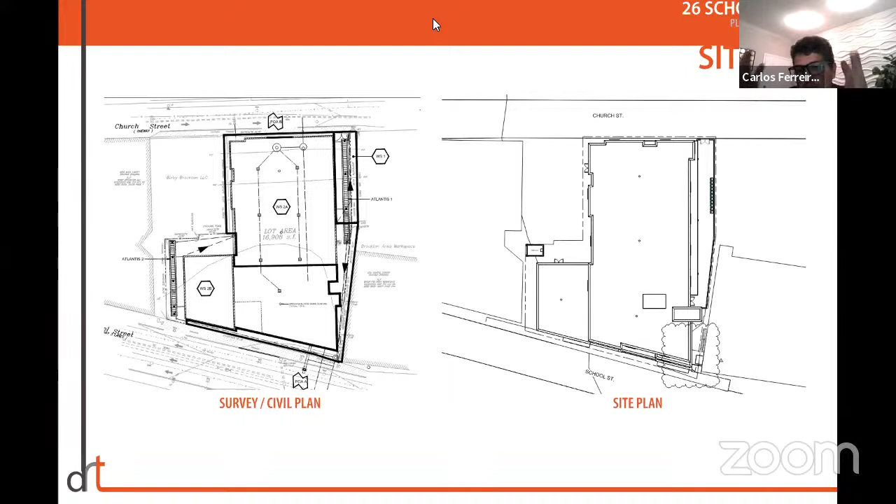We could also have access above the restaurant because there's no apartment or building above it. The restaurant just sits by itself, one level on that side of the building, and that one level extends out.

Theoretically we're supposed to leave it open, but it's an odd circumstance because there's no curb cut, so clearly nobody's using the easement, and the building behind doesn't really need the benefit of it. We've thought of approaching them, but for all intents and purposes, if a restaurant were to use it temporarily or seasonally, it's not really a usable easement since there's no way to drive on it. There's a potential you could walk on it, but nobody really needs it for access.

Okay, awesome, thank you guys. I appreciate it, great plan.

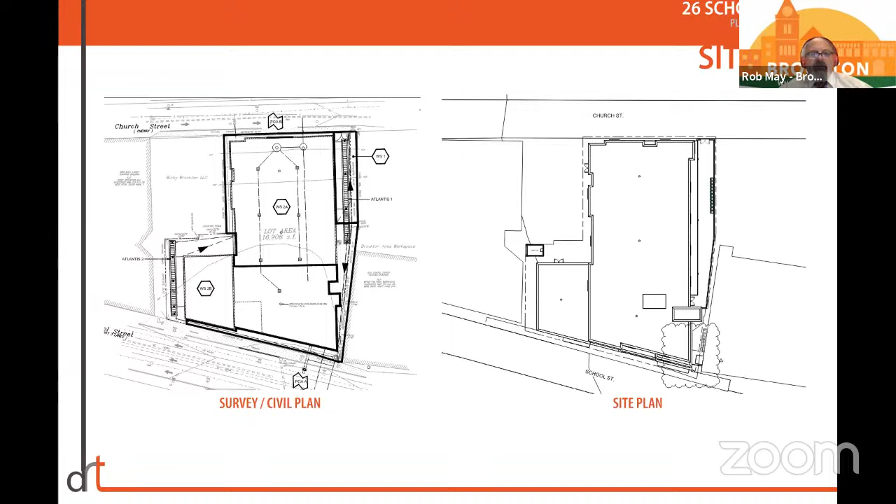Good stuff. Madam Chair, if I could jump in to address Mr. Sweeney's concern: we are working on a new zoning proposal for downtown that will match the downtown action strategy and urban renewal plan, which will increase density even more. It also has a requirement for 25 square feet of open space per unit, which could be achieved through balconies, terraces, patios, or a rooftop amenity for tenants. That's coming in the very near future.

I love it, thank you, Rob. Madam Chair, yes, go ahead.

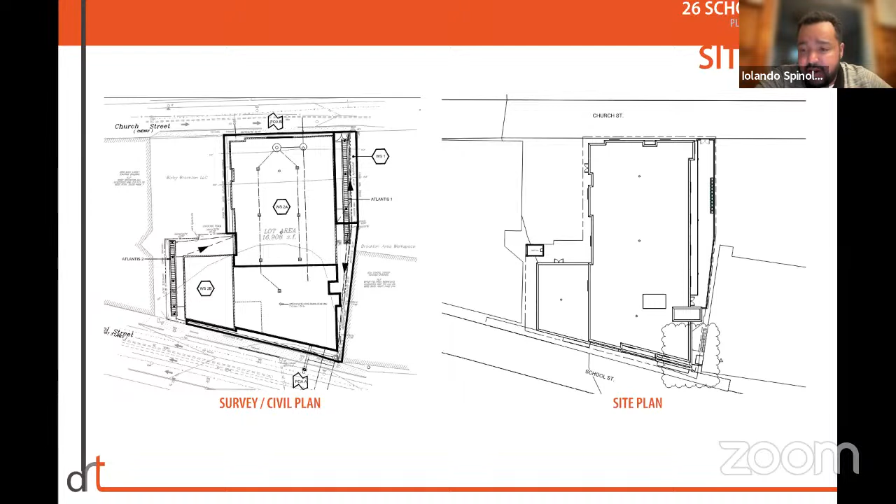I just have a question regarding School Street. I notice there's a curb cut there, and I think that curb cut will most likely be removed and the sidewalk fixed. I'm just wondering if they can clarify that and tell me more about whether there's any opportunity to add street trees. I know it's a pretty narrow sidewalk, but I don't know how much opportunity there is there.

What we did is the zoning bylaw actually encourages us to go to the property line, but we set the building along the school street side. So in front of the building it's way wider. The building is sitting about 5.5 feet back from the sidewalk.

And the sidewalk in that area, let me just measure this... it's about 10 feet, maybe 7 feet of sidewalk. I think the answer is yes, there's opportunity for it. It's about 12 feet wide right now in front of the building.

Street trees would definitely be nice in front of that building. I feel like you can't do landscaping, but adding street trees would be a great amenity. Are you thinking in the ground or planters? Because in the ground, the roots grow up and damage the sidewalk. We have ways of dealing with that.

They'd be in a tree opening pit. The opening we did on the front of the building, where it has the name of the building, that idea was for some sort of yard, a landscape area to have plants to bring some green towards the street.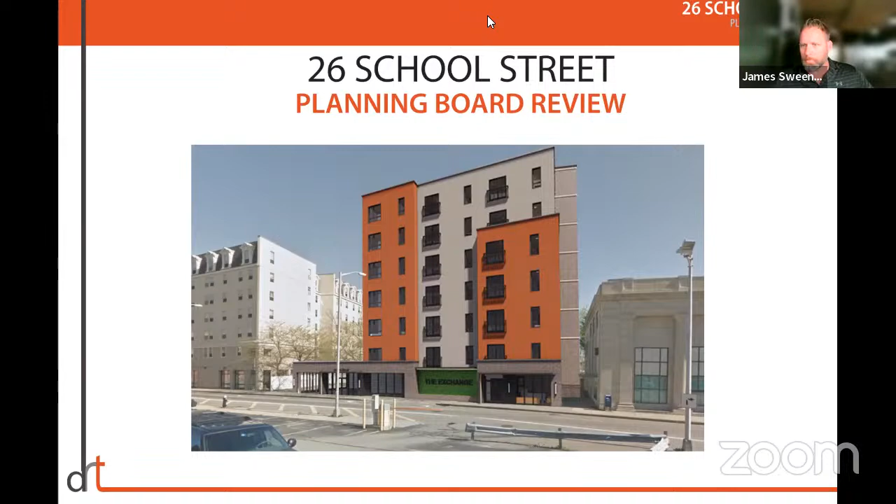Okay, Madam Chair, on the project here, will they have to seek ZBA approval for height, am I correct? No, ma'am. No, sir. Oh, okay, what is it, just so I understand? Under 40R by right. Gotcha, all right, thank you for clarifying.

And a quick point to note, the team forgot to mention this also, but the name of the building is The Exchange, and that refers to the city's first telephone exchange that sat on that site. So you might remember the operators who used to have to place your calls individually. That used to be there.

That's awesome, that'd be nice to throw a little history, something there so people would know, like me, because I wouldn't know that. So if I walk up, I can read it. You should add that. Voluntarily, of course, not a condition, just you volunteer that.

I think it's a lot, for sure. If you get them, talk to Chief Gallery, see if we have some pictures in the Historical Society.

Oh, and quick, for our minutes, how many units again was this going to be? 66.

Okay, all right, congratulations. Thank you. Excellent, nice job. Good job, Chief, guys. Williams, did you have something? Thank you. I'm sorry, thank you, Irving. Or is your hand still up? You're muted. Thanks, I'm all set. Thank you, okay, I forgot to put his hand down.